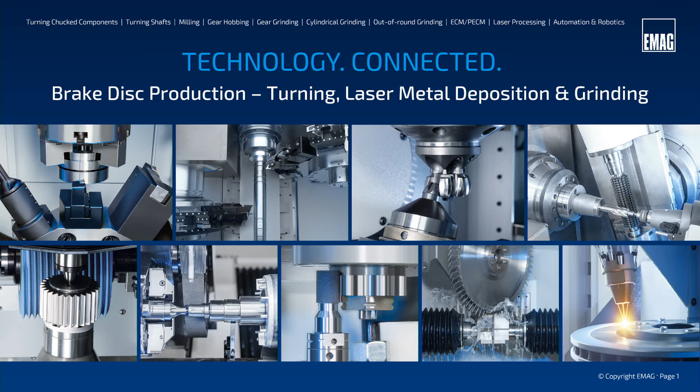And we are very proud to present you today our webinar on the theme brake disc production, from the turning process over LMD to the grinding process. My name is Martin Abenschein. I'm at EMAG in Salach, the technical application team manager and mainly responsible for the brake disc turning process.

And together with me here are Dominik Grimminger and Yannick Röttger. Thank you, Martin. Yes, my name is Dominik Grimminger. I'm the product manager for the coated brake disc at the EMAG Group, and I'm responsible for the complete process chain. Good morning. My name is Yannick Röttger. I'm responsible for the Department of Grinding Technology at EMAG, now with a special focus on grinding of coated brake discs.

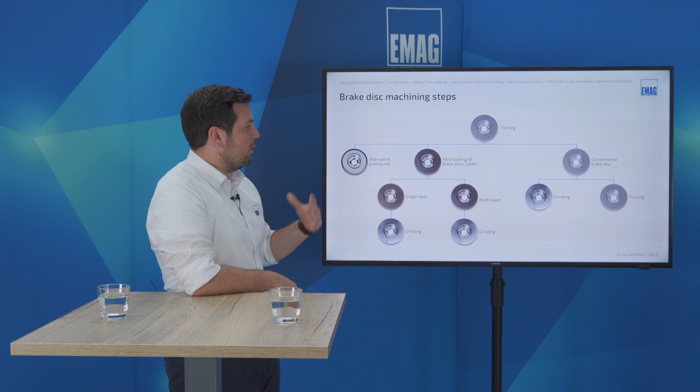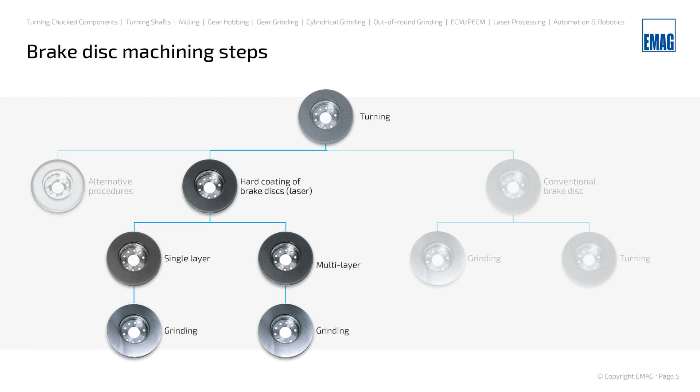Some brake discs in the Asian market have a grinding process at the end, and especially for the Euro 7 norm, we have this hard coating by laser, maybe a single layer or multi-layer, and as a finishing process, again a grinding. We have some alternative processes for the hard coating, but at the EMAG Group we focus on this path: the turning, the laser coating and the grinding, especially for this webinar.

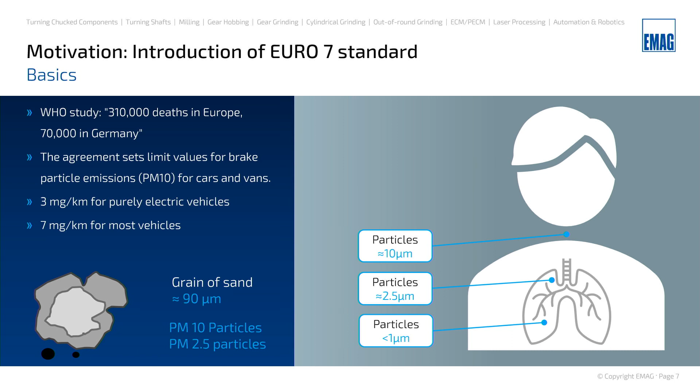Why we have the topic of the Euro 7 standard: the European Parliament has this new regulation to reduce particle emissions from brake discs and tires especially. This means new cars are allowed to emit only 7 milligrams per kilometer, and electric vehicles only 3 milligrams. Especially these small particles, smaller than a grain of sand.

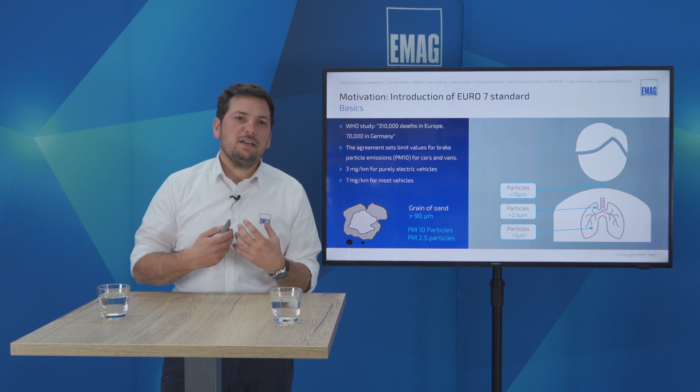A grain of sand has 90 microns, and the particles which are now regulated in the Euro 7 standard are 10 microns or smaller. So we have a comparison here. Particles with a size of 10 microns are collected in the throat, and particles smaller than 2.5 microns are collected in the lung or in the blood. So this is a huge health issue, and with the new Euro 7 standard and regulation, we want to avoid this issue. So we go through the single process steps, beginning with turning, laser coating and grinding, and Martin will start with the turning process.

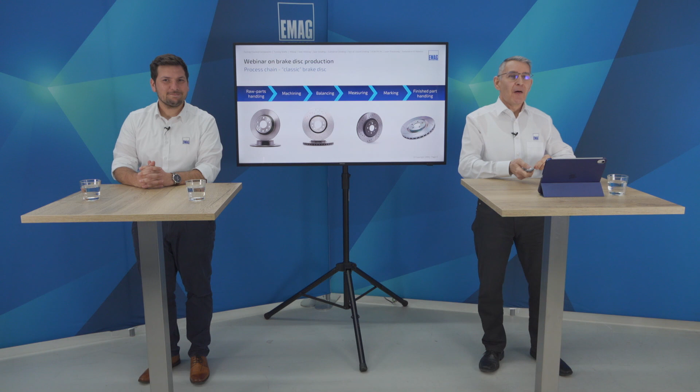Thank you, Dominik. Okay, so coming to the turning process, the normal way to produce a brake disc is that we start with the casting process. The brake discs, ventilated or solid ones, will be cast, and after that we start with the machining process. Normally the brake discs come in gitter boxes or on pallets, and then have to be brought into the production process, either loaded manually by the operator onto the in-feed conveyors or by a robot system.

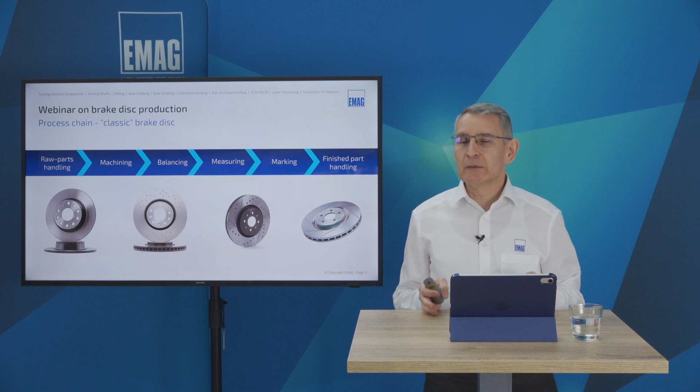Then we have the machining process itself, the turning process, the drilling process, or, like Dominik explained before, for the Asian market sometimes also the grinding process for the cast iron brake discs. After that we have the follow-up processes like balancing, measuring, and marking either by laser or by needle marking, and then at the end we have the finished part handling by a robot unit, and direct transfer into the painting or coating units for the finishing.

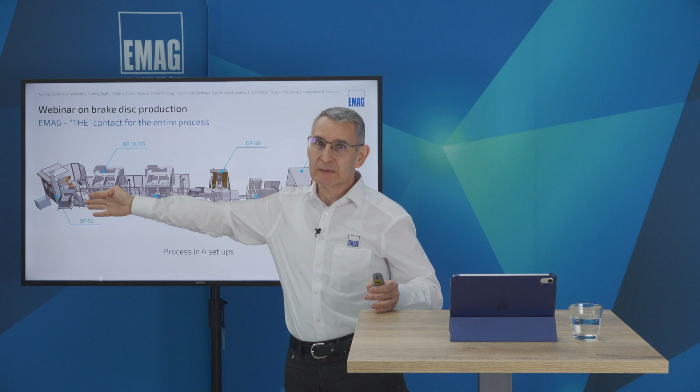If we now have a look at a production line as a reference with 4 setups, here in the beginning we have the robot cell itself, so the robot takes the raw part and puts it onto the in-feed conveyor. Then we have 2 VSC 400 Duo machines for the machining process, so we have OP10 and 20 in the first machine, OP30 and 40 in the second machine.

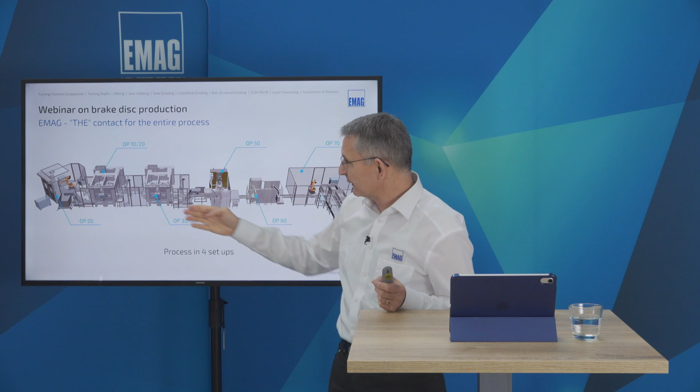In between we have a gantry system which takes the part after OP10, flips it over by 180 degrees, and brings it back to the machine. Then we are machining the second side, OP20, it brings it out, and then the gantry takes the part and puts it onto the buffer band in front of OP30.

Or if this is necessary and requested by our customers, we also have here an SPC chute or an SPC drawer, so that you can easily take out the parts to measure them while the machine is already running with the next part, especially for setup, or if you have a tool change and you want to measure the first part after a tool change.

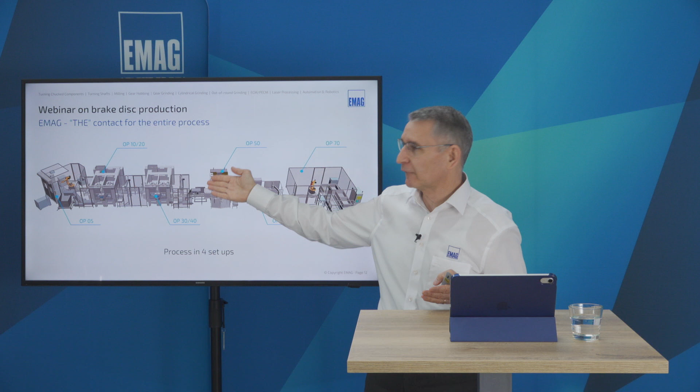Then in OP30 and 40 we have the follow-up processes like drilling and fine turning, and at the end again we have a gantry unit which is also flipping over the parts and brings the part at the end to the follow-up processes. So as you can see here, we have a fully modular concept. We always have the same machine type. We always use the same gantry loaders, so that we can really do it in a very cost-efficient way for a complete line.

Then afterwards, in this example, we have a balancing machine with 2 stations. The number of stations depends on the cycle time of the process. We can have a single, a duo, or also a trio station system for the balancing, as well as for the measuring unit and the marking units. Here we have one combined system for measuring and marking, but there could also be 2 different systems.

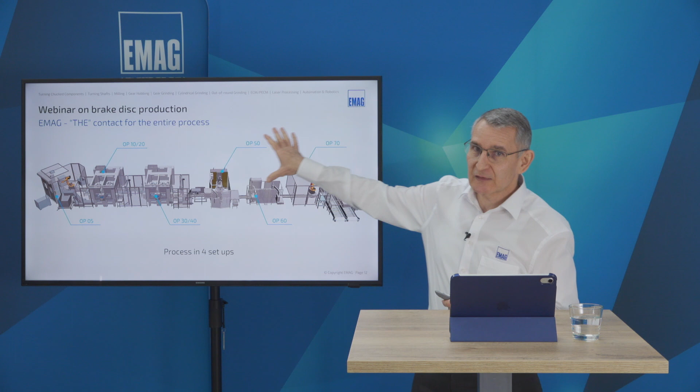And at the end of the line we again have a robot unit which takes the finished parts and puts them here into gitter boxes on a conveyor system. And also here we have the flexibility that we could include some more units like a washing box or whatever is needed. So this is a general overview of such a line.

And if we now look into the deeper process, we start with OP10. This is typically the clamping situation in the ventilation slots for the ventilated ones, or in the OD or on the head for the solid ones. And we are doing the rough cutting process and the finish or pre-finish cutting process for the clamping surface and the locating surface. Then in the second operation we are doing the second rough cutting process of the second side and already the finish turning process of some areas.

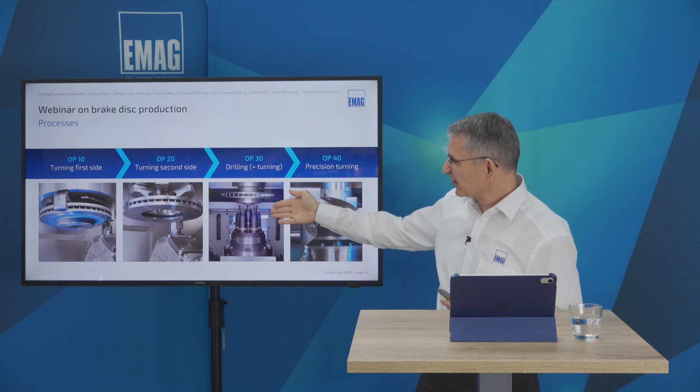In this setup we have a special multiple drilling head for OP30 to do the drilling operation for the screw holes in one time, and also for the assembly holes with a multiple drilling head.

And at the end we are doing the complete fine turning process here by use of an NC straddle tool for the friction rings and with normal standard tools for the rest of the head and so on, so that the geometry itself is based in one clamping. And this straddle tool can be mounted either on the sidewall of our VSC machine type or directly on the turret. So also here we have complete flexibility in the application.

If we are talking about our machine types, we have two possibilities. The first one is the customized machine world. Here we are talking about customer specifications and special requirements which we have to fulfill, and here we normally use our VSC machine types. Here we are talking about machines for the big OEMs or tier 1, tier 2 suppliers with special requirements and specifications.

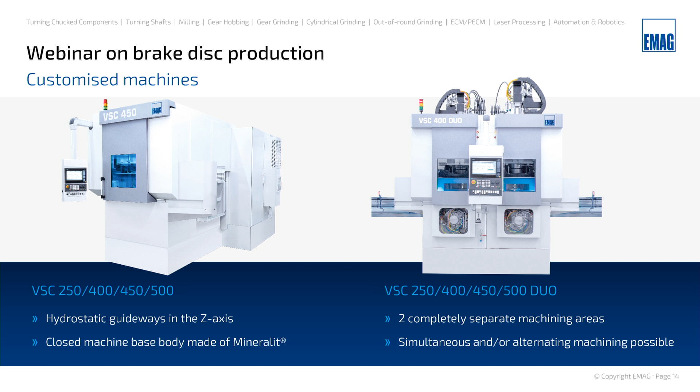As you can see here, we have the VSC machine type in two possibilities. The first one is a single machine type with only one working area, or we have our VSC Duo machine type with two completely independent working areas. So you could have simultaneous machining in both working areas, the same OP10 for example, or you could have alternate ones, OP10 in the left one, OP20 in the right one.

Both types are common in that we have our complete closed machine base and body made of Mineralit. Why Mineralit? Because Mineralit has an 8 times better damping attitude than cast iron. And this is very important, especially if you have interrupted cuts during the process. Because of this, we have longer tool lifetimes and we can achieve better surface qualities and accuracies.

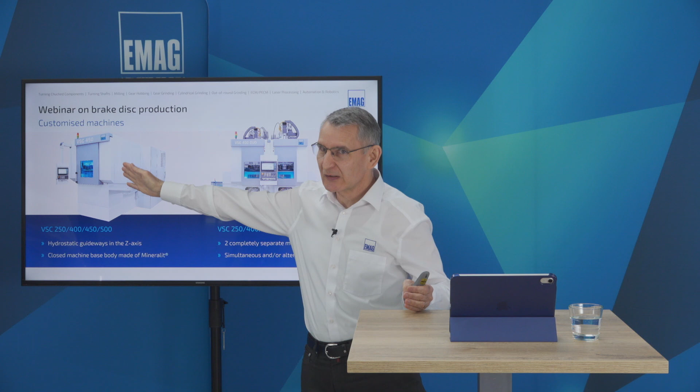And of course, we are using our hydrostatic guideways in the Z-axis in both types, because the Duo machine is nothing else than a single machine put together with one control, one E-cabinet, one hydraulic unit, but split working areas. So they are completely independent from each other, so that the vibrations caused, for example, during the rough cutting process will not be transferred to the other half, where you can do a finishing process at the same time without any influences.

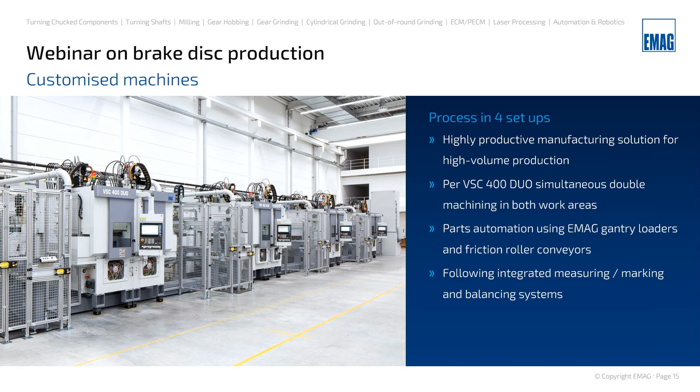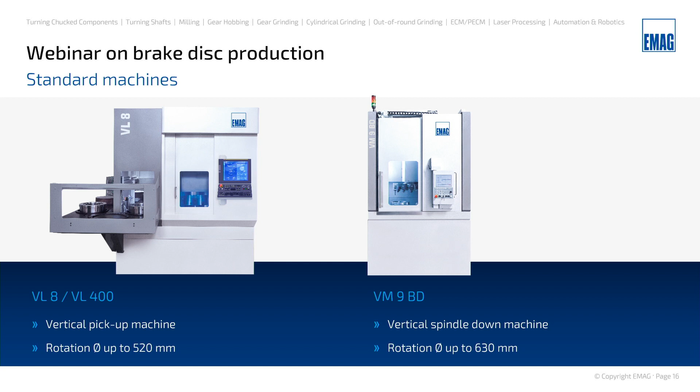On the other hand, if we are talking about standard machines, then we have our VL and VM machine types, which of course can also fulfill customer specifications, but these are our standard machines out of our range of standard products, which starts from VL2 with diameter 100 mm up to VL8 with diameter up to 500 mm in clamping chuck size and with a rotation diameter of 520 mm. So especially the VL8 machine is suitable for brake discs up to 430, 440 mm and can also be combined in a complete production line.

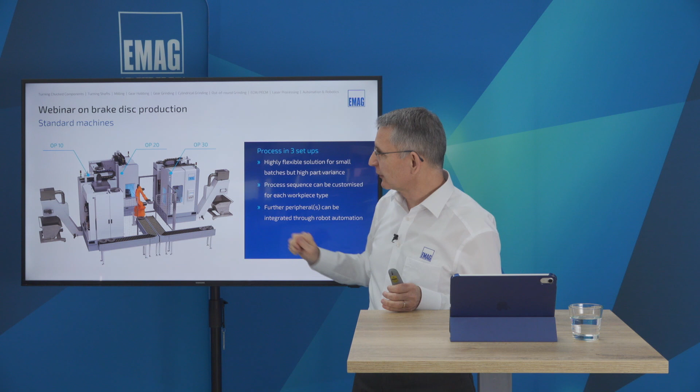If we are talking about a highly flexible solution system, then we are talking about our VM9 BD machine. This machine is a spindle down machine. This is different to the VL8 or VSC machine types, where we have the hanging spindle with the hanging clamping chuck. Here we have a spindle down machine, and as you can see here, it's very easy to load the machine also by hand. Both machine types, of course, also have a column made in mineralite for the best damping situations during the process.

And here you can see a very flexible system, a very flexible solution, especially for the aftermarket, because here we have 3 VM9 machines positioned around one robot unit in the center, which is loading and unloading the machines with raw parts and takes the finished parts out. And here we are doing the process in 3 operations.

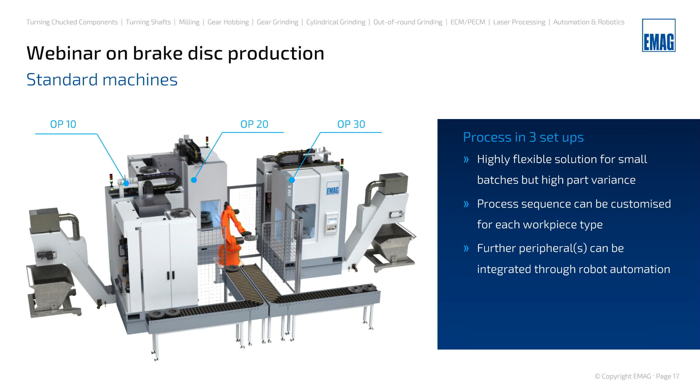And this is, as I mentioned already, a highly flexible solution, because if you have a very small lot size, but you need the parts very fast in a very short period of time, then you can even load these machines by hand. You can set up the machines very quickly, and you don't have to use the robot for that. If you have to make only 10 or 20 or 50 parts, you just load the machines directly from the front door, because you have complete accessibility to the machine itself, even with a robot system standing beside it. So you can use it as a single machine or in combination as well.

Okay, so that was a very short overview of the possibilities for the turning and drilling process. Of course, we also have machines for the drilling operations, for the perforation drilling holes in the friction rings, or combined machines for the turning and grinding of cast iron brake discs.

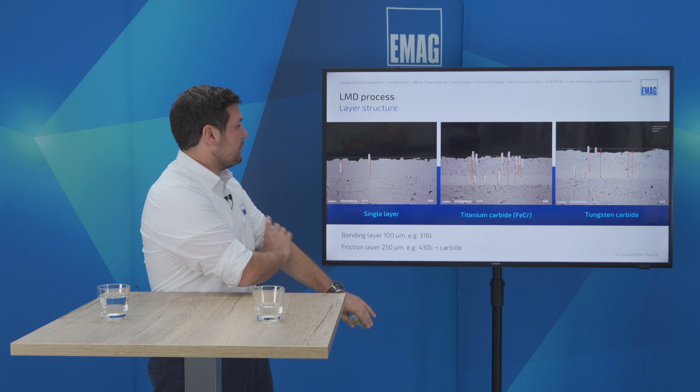So we have options for a single layer system. Single layer system means we don't have any buffer layer between the friction layer and the cast iron, mostly used for lighter vehicles. And the other two options are multi-layer systems.

We have a bonding layer with a thickness around 100 microns to 150 microns. It's a stainless steel in most cases. And we have our friction layer. The friction layer is a combination of carbides and also a stainless steel matrix.

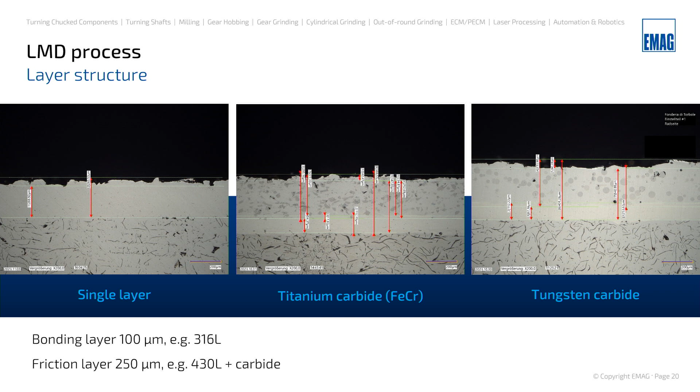We have some versions with titanium carbides or titanium ferrochrome carbides. So that's one case, and the other one is with tungsten carbides. So different layer systems, all proved with the laser cladding process.

When you have a special powder or a different layer system, please let us know. We can prove and test our process with your powder in our laser application center. So these are crosscuts after the cladding process.

We are here live from Heubach, so we have the opportunity to show the key figures directly on the machine. So please follow me, I will show you the machine itself. So I'm standing here right in front of the ELC 452 LMD. You see we have here our process module.

We have this modular system, which means we can choose different machine sizes, beginning with one process module. Here we have a machine with two process modules, or even the possibility to have three process modules.

So depending on your layer system, depending on the layer thickness and the production scenario you have, we will find the right machine concept for you, which fits your needs perfectly.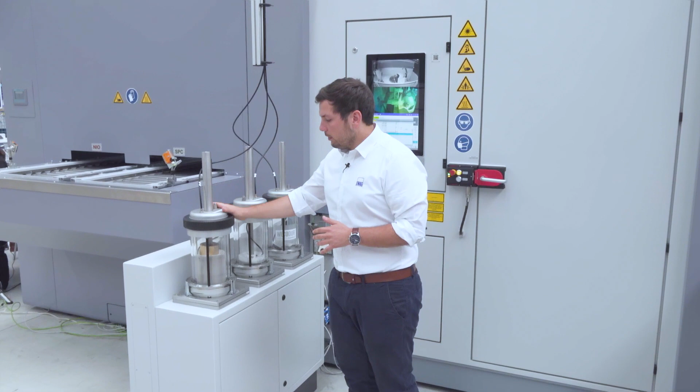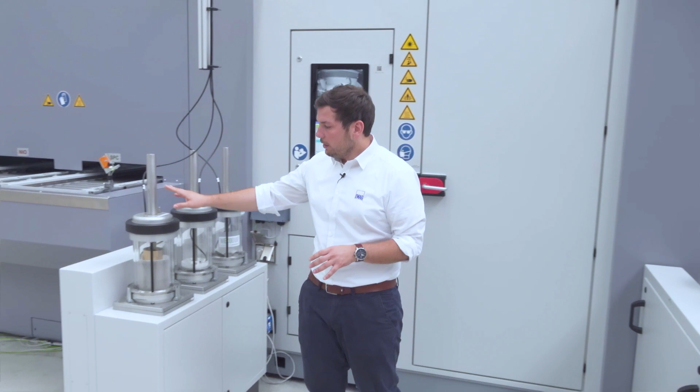These powder hoppers are a little bit special because they have this top-down system. With the system we have the possibility of a really fast refill or change of the material and the powder. So it means we can change each powder in less than 30 seconds. So it's a fast system for you and for your production.

The powder hoppers have a powder feed rate of 150 grams per minute, so for each hopper 150 grams. In this system we have our bonding layer here, our matrix here, and our carbides are in the last hopper. So with this system we can produce for each process module a bonding and a friction layer. Let's have a look inside the machine.

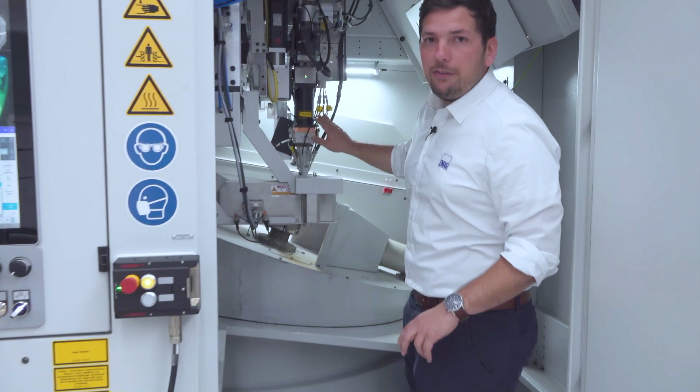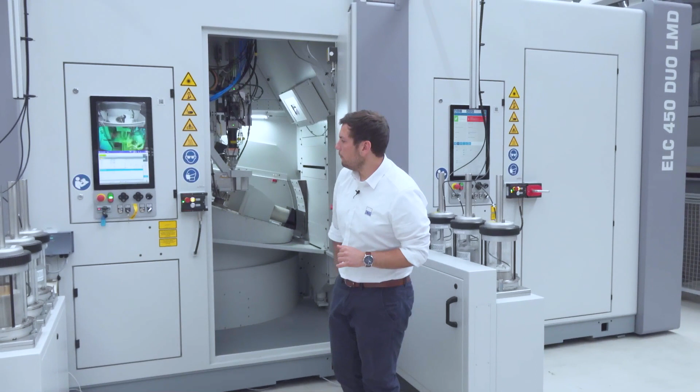Right in front we have our process optic, we have our melt pool monitoring, and at the back side we have our surface scanner. The clamping device is made by EMAG, so we have our special clamping device only for this process. To show you the process, we made a short clip, so have a look.

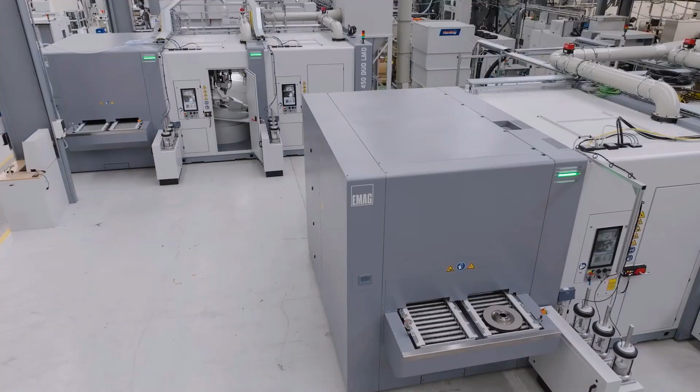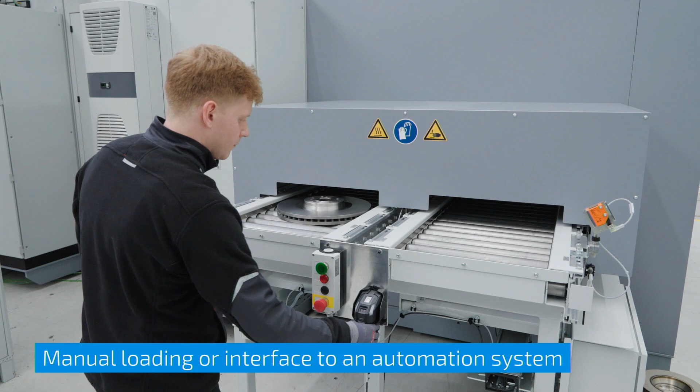So here you see two ELC 450 DUO LMD machines. We have the option for manual loading and the option for automatic loading, so with a gantry or a robot cell. Inside of the machine we have our handling system, a gantry loader which is responsible for handling the parts for module 1 and module 2.

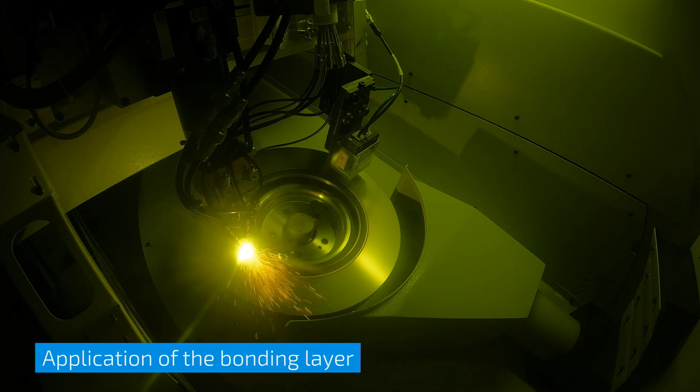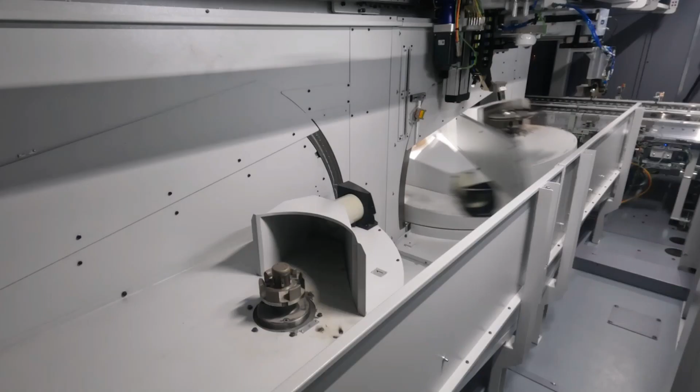On the first station we now have the application of the bonding layer, so the first layer system for both sides. Also the layer thickness sensors are for the in-process measuring. The gantry loader is also responsible for the flip over, so the whole system is responsible to handle the parts from the raw to the finished part side.

Our table has a switch time of 0.8 seconds, to minimize the powder loss and the idle time. Now we are on the application of the friction layer, and again our surface scanner is inside. The surface scanner is important because otherwise when you want to check your layer thickness, you have to cut the parts, and so you have a look on the process itself.

Also included is our powder collector in the middle of both machines to avoid spreading the powder into the machine. And you will receive a finished part at the end of both process modules.

So here on an example of the DUO machine, we have the integrated automation, so you are only responsible to handle the raw and the finished parts. We have the technology package inside, which also includes quality software and the quality features.

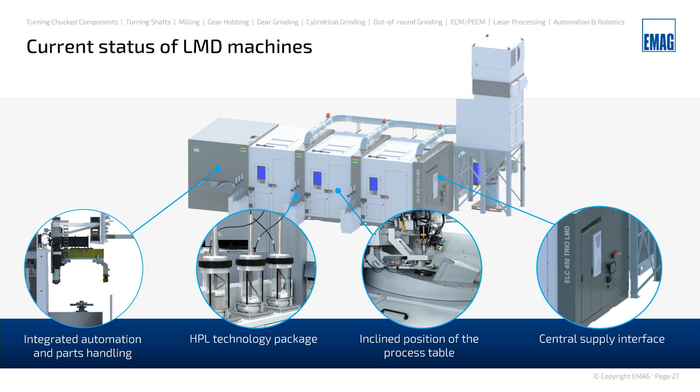you only need one central supply for dual, trio or mono machines. The same as the automation interface, you have only one connection to your system. So I hand over to Yannick Röttger and the grinding process.

Thank you, Dominic. In the next chapter, I'd like to give you a short overview of the last process step, double-side face grinding. Why is it necessary to have a post-processing after laser cladding? Depending on the carbide size and the process parameters during laser cladding, the average surface roughness of the coated brake disc is up to 100 microns.

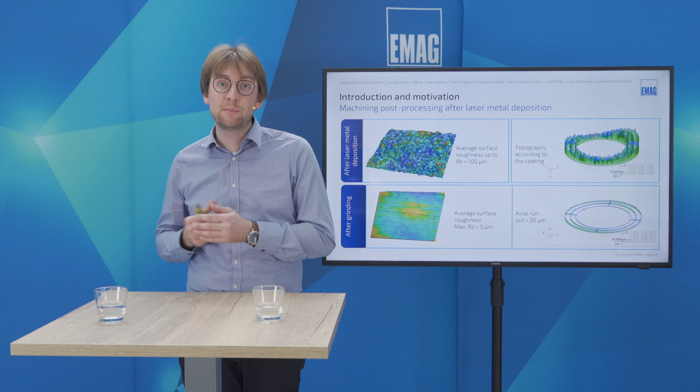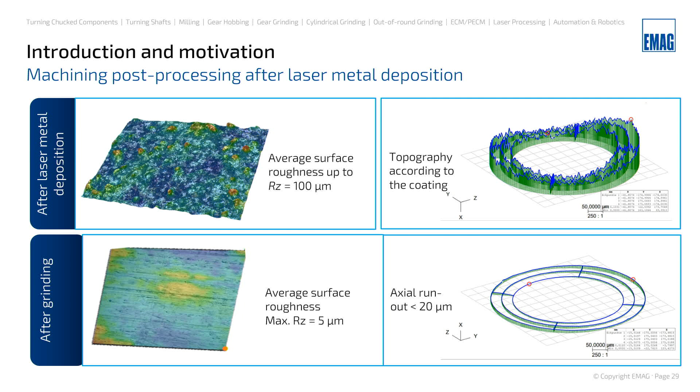For the functionality in the brake system, an average surface roughness of maximum 5 microns is required, for some applications even lower. Not only the microgeometry, the roughness, makes post-processing necessary, but also the thermal impact, the energy impact during laser cladding. There is a relaxation of residual stresses which leads to shape deviations of the brake disc after the cladding process.

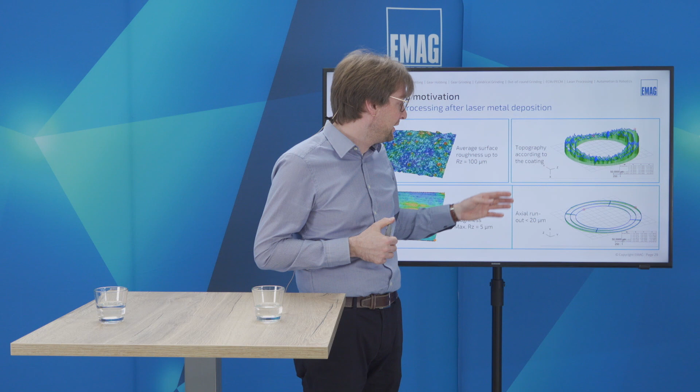You can see the topography after the coating for the brake system. After the grinding process, axial runouts of maximum 20 microns are required. Dominic already presented an overview of the coating systems which are produced in laser cladding. We, of course, do the grinding process for them. Very challenging for the grinding process because of the hard particles are the multi-layer technologies.

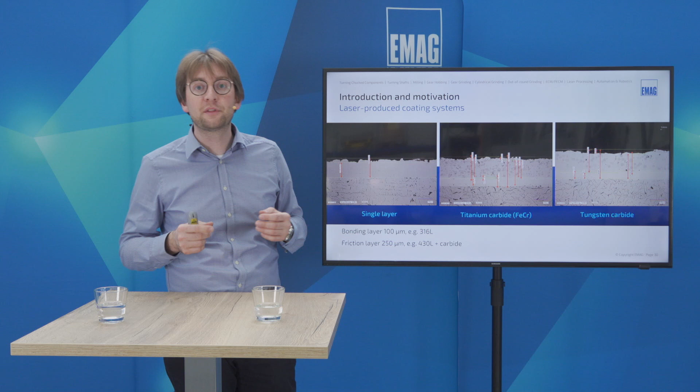The friction layer after cladding has an average value of 250 microns, and usually after the finishing there is a requirement of a thickness up to 100 microns. The problem is that every optimization in the laser cladding process which leads to a reduction of the fine dust emissions in the brake contact usually makes the grinding process much more challenging. Because here we want to remove a high material volume in a short time, and so that's a target conflict.

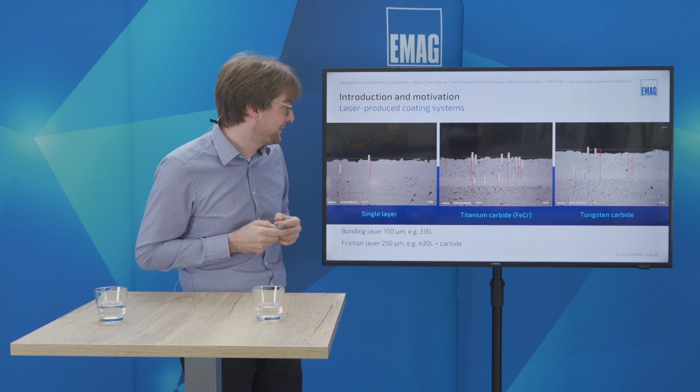What is our answer, the EMAG answer for this machining task? The VLC 450 DG. This machine is based on decades of experience in the construction and manufacturing of machine tools with vertical spindle layout. The customer or its automation system provides the raw part in a horizontal orientation on the workpiece shuttle. On the Q1 axis it goes into the machine.

The raw part is lifted up by the W1 axis and provided to the main spindle S1 with the clamping device. The X1 axis brings the part between the two double-side grinding wheels, and during production we have an axial infeed of the two grinding spindles S3 and S4. So this results in the grinding result with a cross pattern structure.

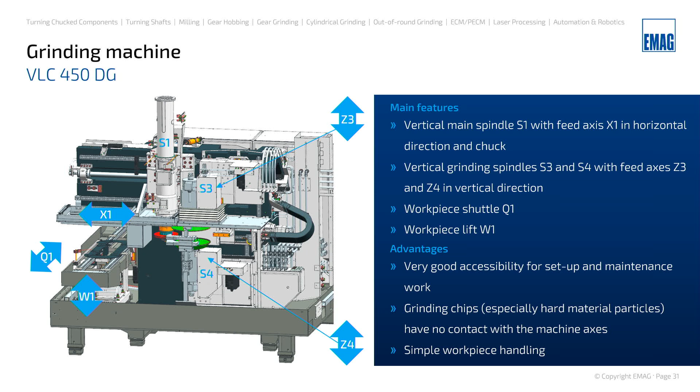The machine is designed to machine workpieces, brake discs with an outer diameter up to 450 millimeters, so we are already prepared for the production of brake discs for trucks. What are the main advantages of this machine concept? We have a very good accessibility for setup and maintenance work. The operator has a good overview of the contact zone between grinding wheel and brake disc.

The grinding chips fall down in the dust collector and are removed out of the machine by the coolant. So especially the abrasive hard coating particles have a very reduced contact to the machine axes and their sealings, which has a positive influence on the reliability and the lifetime of this machine. The customer just has to provide the part in horizontal direction or take back the ground part from the workpiece shuttle. Everything else, clamping and so on, is done by the machine itself.

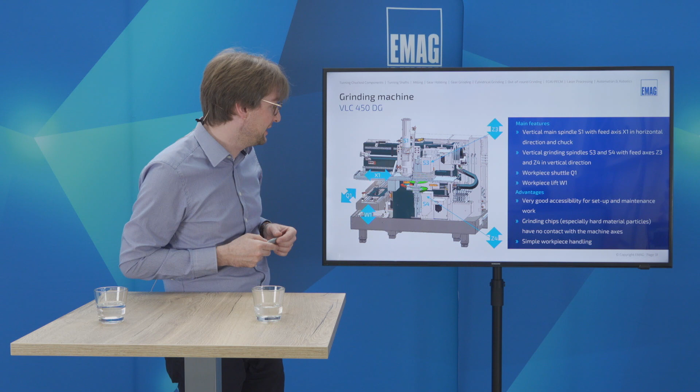Now you see some live pictures. In the background you see our laser cladding machine that Dominic just presented. Just opposite of it we have one of our 4 grinding machines for prototyping. Here we are producing prototypes for many different customers, for different coating systems, not only coating systems that have been produced here in Heubach, but also cold gas spray coatings. Whatever the market requires, we can grind it here in our shop floor for prototypes.

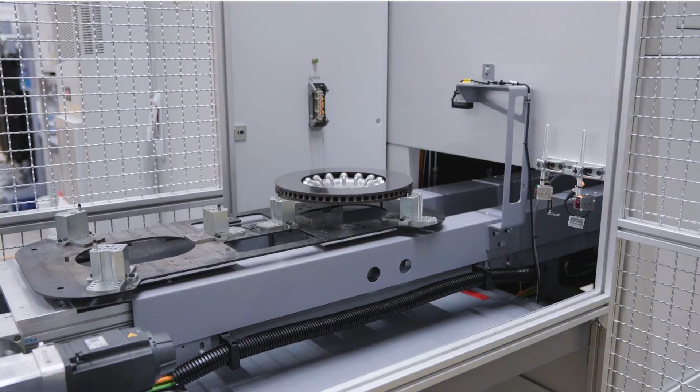To give you a better overview of the machine and its kinematics, we provided a video without coolant. Here you see that there is a good accessibility, a good overview. The workpiece shuttle brings the part into the machine.

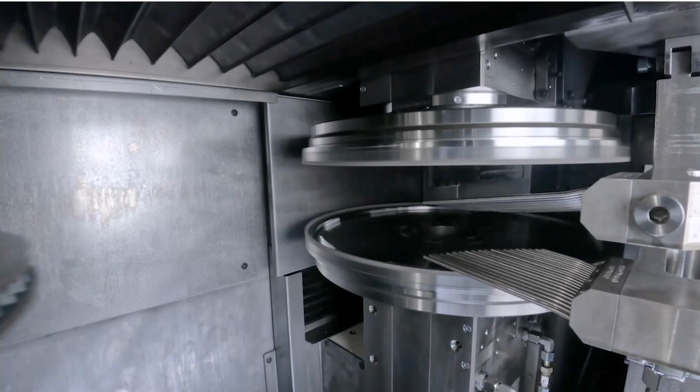The workpiece lift gets the finished part after machining from the main spindle or provides the new part, the raw part, for the production. With the one axis, it is brought into a grinding gap between the two grinding wheels, and now actual infeed takes place for the machining.

For the coolant supply, we use needle nozzles. They are focused on the finish thickness of the brake disc, so they are always correctly positioned. We do not need any wear compensation. For different brake disc geometries, for different thicknesses, you can change the whole system of the two needle nozzles to save time for tool and workpiece change.

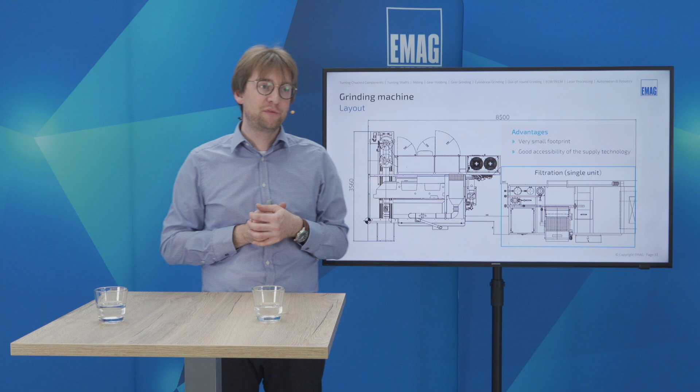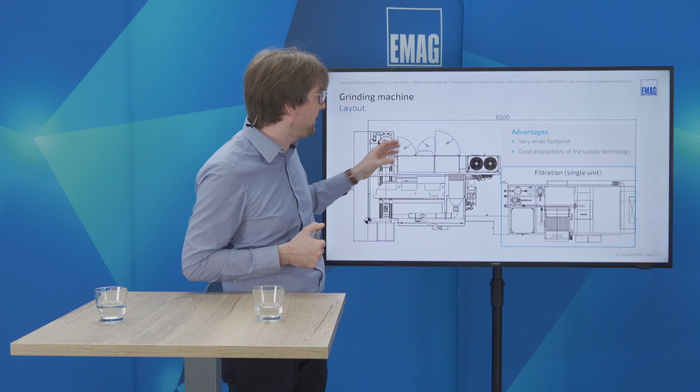In the top view of the machine layout, you can see that we have a very small footprint. If you use a single unit for coolant supply and filtration, we have a footprint of 3.6 meters in width and 8.5 meters in length. It can be reduced if we do not need a single unit for filtration and coolant supply.

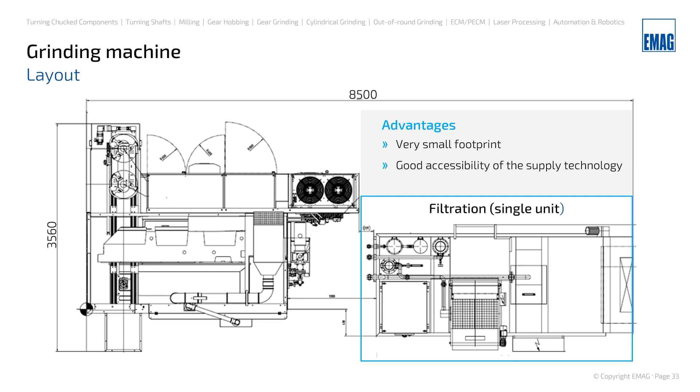If we use a central station, we have really a very small footprint. We need small space in your production, and as you can see, there's a good accessibility of the supply technology for maintenance.

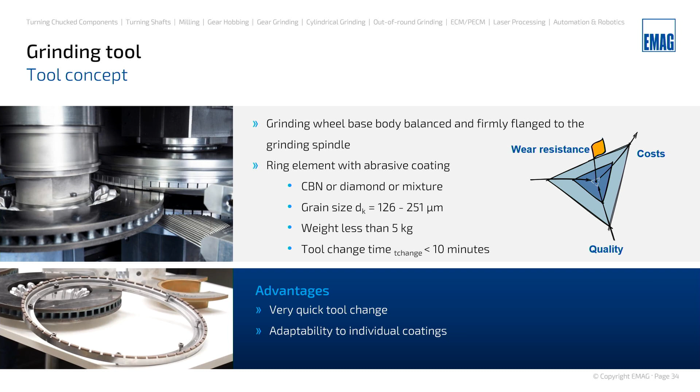Our tool concept is based on small rings which are fixed on a spindle flange on the base body. These rings have a weight of maximum 5 kilograms. The grinding layer, the abrasive layer, is put on this ring. It is very easy to change them.

10-minute tool change time for 2 spindles, so we have the possibility to save time in production and also to adjust, to choose the correct tool for the individual coating system, because every coating system requires its own designed grinding wheel specification. We're using diamond or CBN or a mixture of both grain materials for our grinding layers.

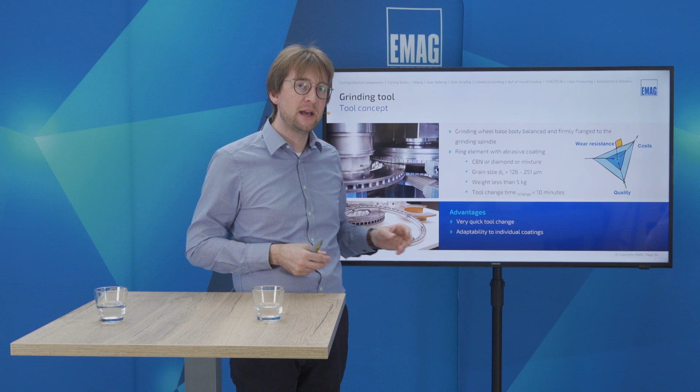The average grain diameter varies between 126 and 251 microns depending on the application. We use the whole range of bonding systems for the grinding wheel. We achieve good results with metallic bonding, also with ceramic bonding, vitrified bonding, and for some applications we have good results with resin bonds. Main focus currently is on CBN and metallic or vitrified bonding.

We work together with the leading manufacturers of grinding wheels in this branch. It is our job to enable them to make very good grinding tools that achieve good results with regards to low costs, high wear resistance, and good quality of the finished part, so the customer can choose his preferred supplier for the grinding wheels in whatever location he wants to produce brake discs.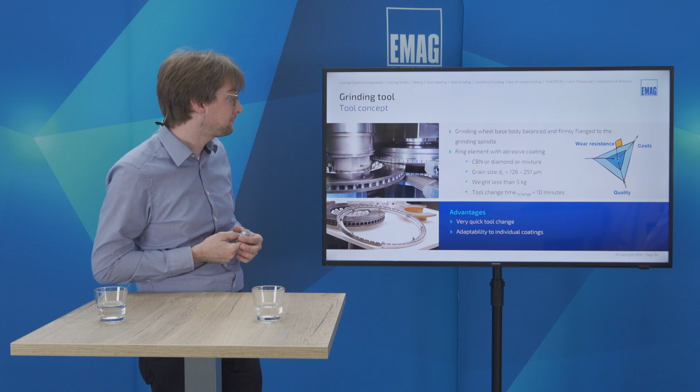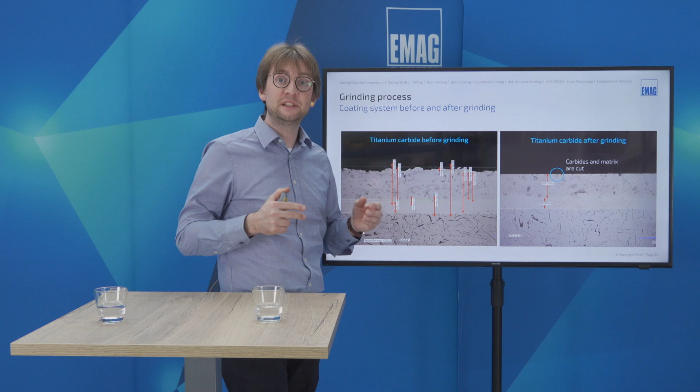What makes the tool design and the selection of the right process parameters so difficult? We are dealing with a multi-phase material. What does it mean? We have two materials: the soft stainless steel matrix with a ductile machining behavior, and the hard coating particles with a brittle hard machining behavior. For ductile materials, you usually use high relative speeds, try to produce low chip thicknesses.

For hard brittle materials, you use different grinding tools and low relative speeds to produce micro cracks which lead to the machining. As you can see here in the analysis of a cut brake disc, we have to be able to cut both the soft matrix and the carbides. This makes it quite difficult to find the right setup.

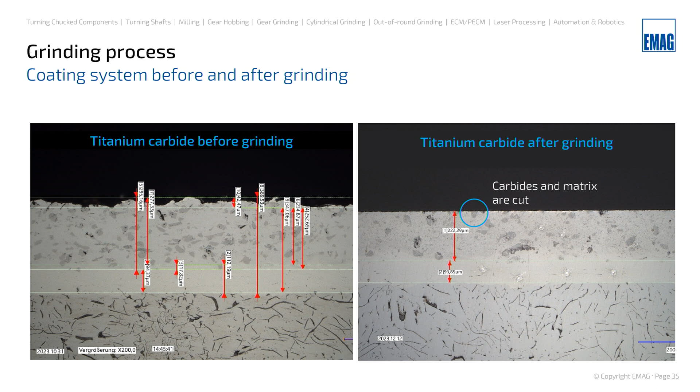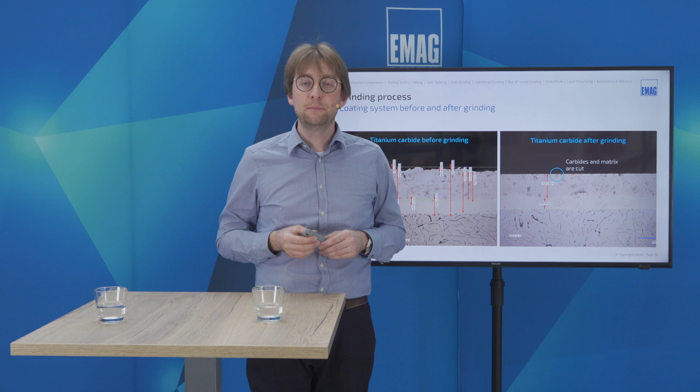Currently we are working in a range of grinding wheel circumferential speeds between 2 and 30 meters per second, and our grinding spindle has to provide very high torque for this application.

Besides the material properties of the brake disc, also its geometry makes the grinding process challenging. Of course, our dream case is a coated brake disc with a perfect flatness without any warping. It would be enough to have a total depth of cut during grinding which is just slightly higher than the surface roughness to get a brake disc according to the quality requirements.

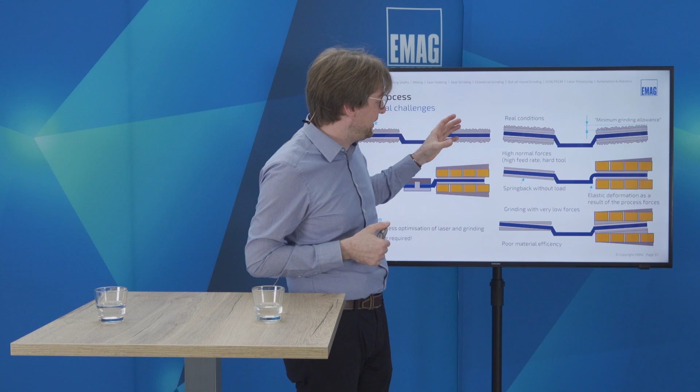Real conditions are shown on the right side. Due to the thermal impact, we have warping, we have shape deviations, so it is necessary to grind a higher depth of cut, a higher grinding allowance. If we choose too high feed rates, too hard grinding tools, which provoke high normal forces, then it is possible to get a clean surface, to get rid of the surface roughness.

But as the brake disc is quite flexible in the axial direction, after the contact with the grinding wheels, the friction ring would spring back and we would have problems with the geometry, with the run out and the flatness of the finished part. If we try to avoid high normal forces, we can work with low feed rates, which lead to a high cycle time. We do not want this, or we use very sharp grinding wheels, which lead to high tool wear.

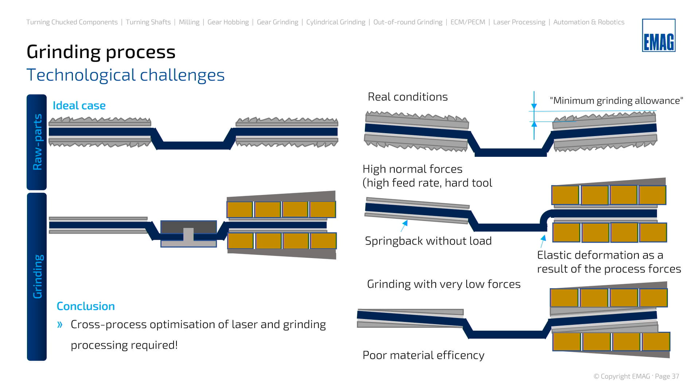Then it would be possible to make parts with a good surface roughness and a good geometry. But as you can see in this case, the friction layer has a conic shape, so the material efficiency is very low because we have a constant friction layer thickness after coating, and in this area we have to grind much more material than necessary.

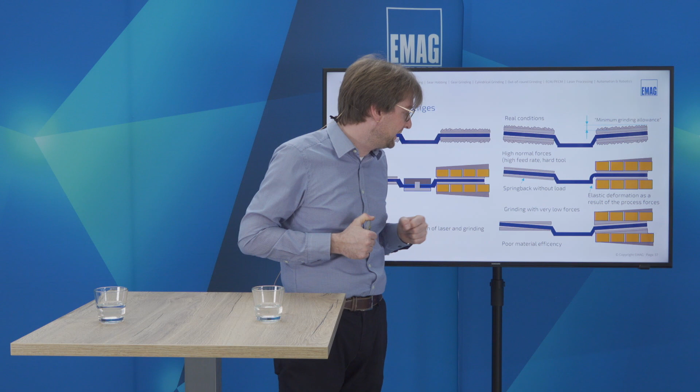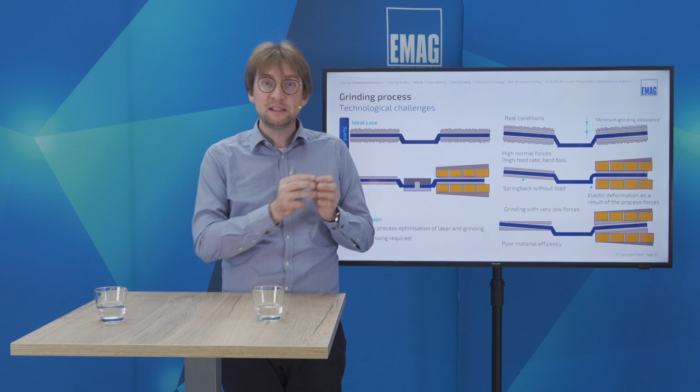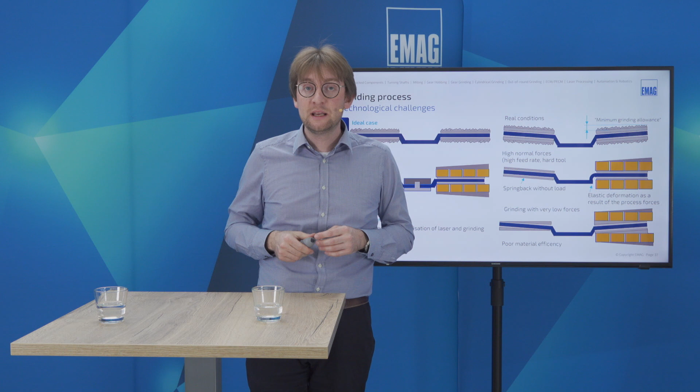So the key message of this slide is that it's very important to have a cross-process optimization with special regard to laser cladding and grinding process. Single optimization for both process steps would not lead to a good result for the customer. That's why we are very happy that we can analyze and optimize both processes here at EMAG on one facility.

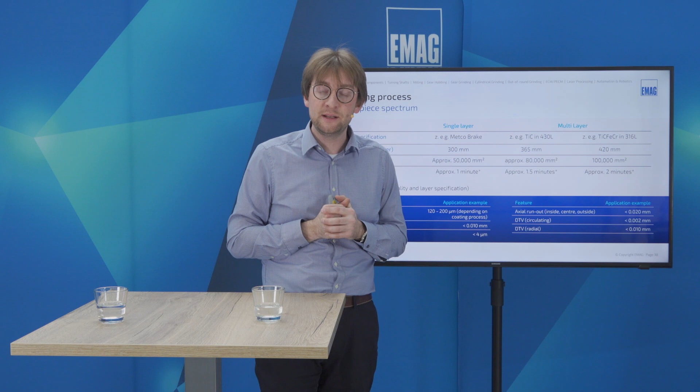Finally, I want to give you a short overview about cycle times and results that we achieve if we have a perfect input quality after laser cladding for the grinding process. So it is just necessary to remove a very low grinding allowance. This, for example, for single layer technology, which is quite common in mid-range passenger cars, on the rear axle with an outer diameter of 300 millimeters, which leads to a friction ring surface of approximately 50,000 square millimeters. We can achieve a cutting time after workpiece change and search for contact of about 1 minute.

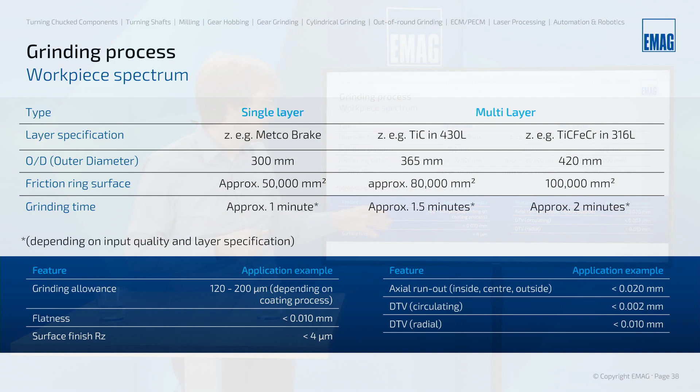For higher dimensions, for example 365 millimeters, which refers to the friction ring surface of 80,000 square millimeters. We see these discs often with a coating with titanium carbide in 430L. We have to calculate with a cycle time of about 1.5 minutes for perfect input quality. Or the biggest diameter in passenger cars, 420 millimeters with titanium carbide, ferrochrome in 316L, a friction ring size of 100,000 square millimeters. It leads to a cutting time of approximately 2 minutes.

Very important to clarify that higher grinding allowance, of course, leads to higher cycle times and higher wear, and also important that there are some coating systems which are much harder to machine, so it's important to find the best solution to every coating system. Every system has its own set of parameters which lead to the best results in production.

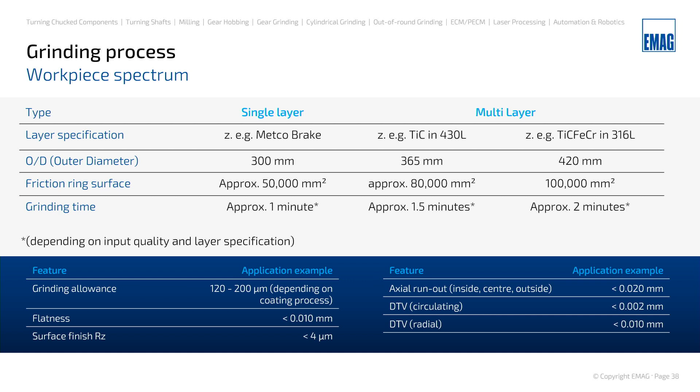Just some words to the achieved quality. The flatness is lower than 10 microns, surface finish lower than average surface roughness of 4 microns. The axial runout measured on 3 different sides lower than 20 microns, and the DTV, the thickness variation in circular and circumferential direction lower than 2 microns, and in radial direction lower than 10 microns.

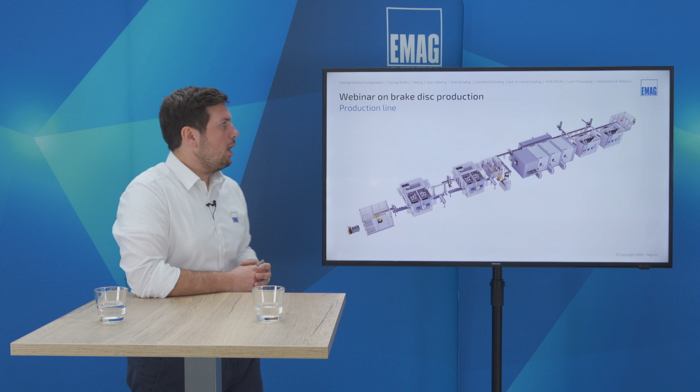So now I will give you a quick overview over all 3 processes, how a production line can look like, made by EMAG. So all 3 processes are connected here. We start on the left side. We have our bin picking cell, so loading of the parts. We have the pre-turning in 4 operations, means 2 VSC 450 Duo machines. Operation 10 and 20. The gantry with the flip over function in the middle. Then we have OP 30 and 40, so drilling and finish turning on the second machine.

After the turning operation, we need the marking and balancing and the end of line measuring as for the traditional brake disc. After that, we have the conveyor system to our cladding machine. Here we have the link with gantry again. So we decide here for ELC 450 Frio machine, a 2-layer system, means we have the bonding layer in the first module and the friction layer in module 2 and 3. After cladding, we have a surface temperature between 100 and 250 degrees, depending on the layer system and laser power we use.

So after our cladding process, we go through a cooling tunnel on the back side, as we also use at our common laser welding process, to have the parts again at room temperature to give the grinding operation the best starting parameters. Then we have 2 VLC 450 DG machines, so 2 times the grinding, also linked with the gantry system.

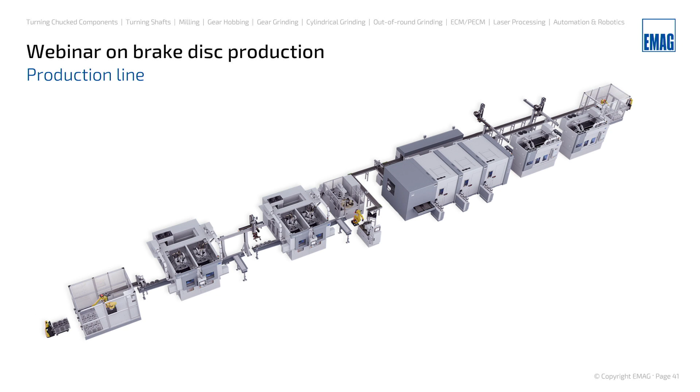At the EMAG group we have different variations of automation systems, so we are more than happy when we can calculate and have a project with you to optimize this line for you and your needs.

So we are done, or finished with the presentation. Martin, maybe we have some questions to the webinar? Yes. Okay, indeed we have. I think we got a lot of questions. So I think the first one is already for Yannick.

Question is, what is the cycle time average for the grinding operation, and what is the tool life of the grinding wheel per parts? Yeah, unfortunately, it's quite difficult to give a precise answer to this question because there are many influencing parameters on cycle time and, of course, the tool life. So you found some information about different coating layers and different friction ring sizes in the presentation.

So there are many applications where we are working with cycle times lower than 2 minutes. But as it's absolutely based on the coating system, on the grinding allowance which is necessary to remove, and on the friction ring size, I kindly invite you to contact me together with my technical sales team. I'm sure we will find a good approximation for your individual machining task.

Okay, thank you, Yannick. Then the next question came up. I think it's one from my side, so I will answer that. In comparison, how much is the saving between VSC and VL solutions? Can be in percent, and about quality, the same. Okay, let's start with the second part of the question. The quality is the same.